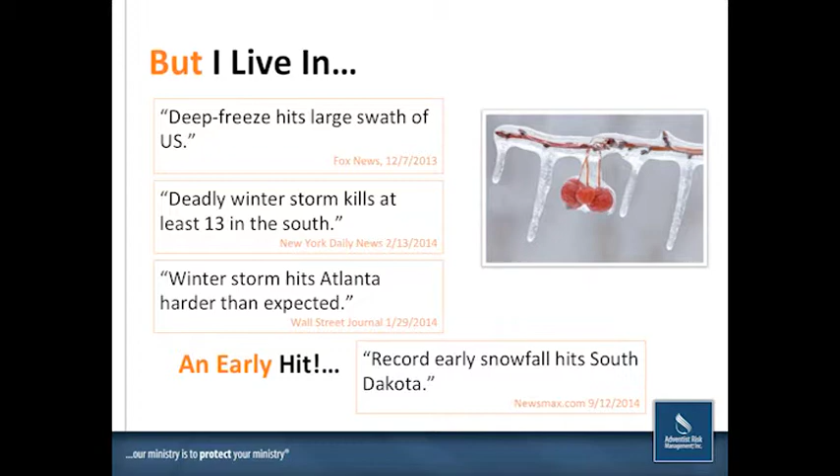And then some of us have had an early hit. Look at the record early snowfall that hit South Dakota, 9/12/2014, and everybody knows Denver has already had some snow. Wyoming got hammered. So these are the kinds of things we have to be ready for well in advance in some areas, and in others it could come whether we expect it or not.

Now we talk about being prepared with winterization, but in some ways it should really be part of the year-round preventive maintenance program. How our systems work and what we do to keep our buildings in shape are critical year-round. As you can see in these pictures, there isn't much excuse to have a bush growing on top of an eave like this one over the dock overhang, and this gutter, as you see in the picture on the left, with plants growing in it.

Those gutters are not going to do the job they're intended for. The water will not flow away from the building. It's very likely it will back up, could go underneath the roofing materials, and then seep into the building and cause damage. When we have deficiencies like this, it's very important that we look at change.

We have to develop a good preventive maintenance program and make sure our gutters are cleaned. During the fall they're constantly filling with leaves. This picture in particular was not during the fall, and neither was the one with the tree, but they'd had plenty of time for this vegetation to grow because I was looking at it in early summer. So start early and keep up with these kind of things on your property.

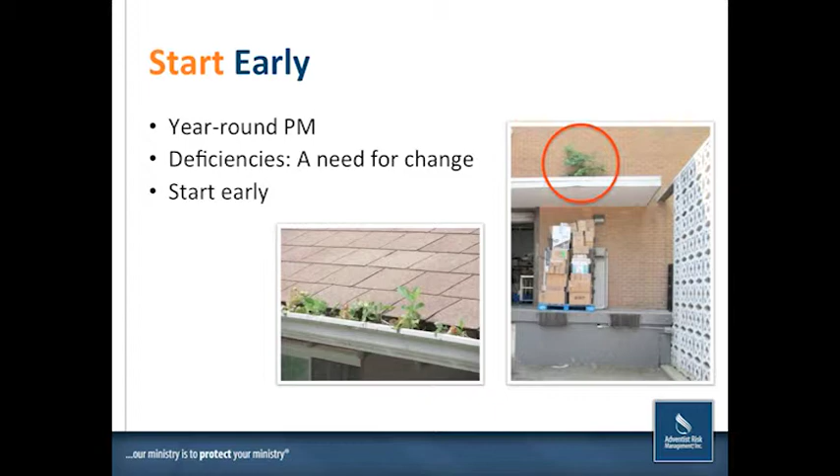Have we planned ahead for what can occur? We could very easily have power outages that will prevent us from being able to use our heaters, which can then lead to frozen pipe issues. So we may have to think seriously about secondary power, like generators or something, to make sure we can keep our buildings warm and not have the pipes freeze and break and cause subsequent damage.

Snow and ice removal, a lot of facilities will contract for it. If we do it internally, we have to make sure we have all the proper melting materials available, shovels, people ready to respond when the storm hits, and get the sidewalks cleaned up so we won't have slips and falls and those kind of losses.

The easiest way is to contract. If you've got a dependable contractor who'll come in and make sure your parking lots and walkways are clear come Sabbath for church, then your deacons aren't running around early trying to get that done and slipping and falling themselves before they finish it.

And roofs, making sure we don't have that buildup of ice and snow on our roofs. That's a dangerous place to be. If you can contract it, that's the better way to go. There's some who will have devices along the roof line that will help melt it along the edge so it doesn't build up as much behind it and create a dam.

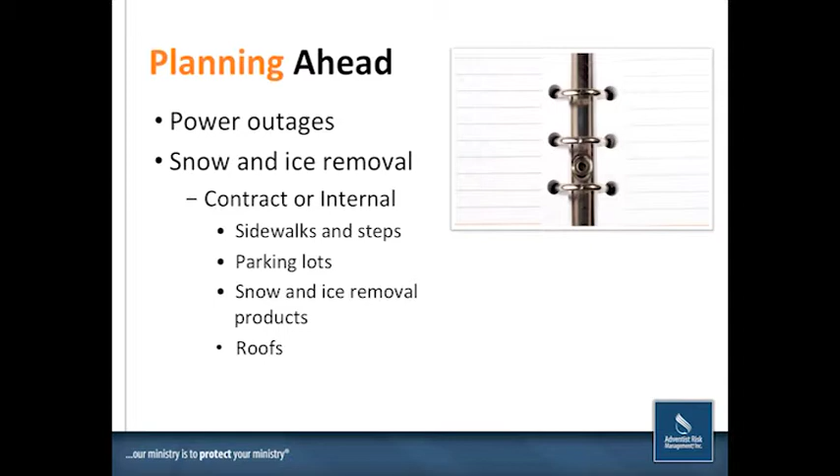Roof protection is important. It will subsequently lead to a lot of leaks internally if we don't take care of our roofs. And when those winter storms hit, it'll seep in, or if there's winds involved, it'll tear things up. As you can see with the shingles on the right that are starting to lift, once you get a lot of wind, those shingles are going to start lifting more and more, and eventually there'll be a whole patch of unprotected roof that can lead to a lot of damage.

The little device you see on the left is the kind that, when buildings are designed, should be built so strong winds can't lift roofing materials. Those kind of brackets attach rafters and things to the sidewalls and make sure that doesn't happen.

And we talk about our maintenance. This is an actual picture I took in the field with a tree laying across the roof line. It has already caused damage that could lead to leakage. When we arrived, I don't even think it was in a work order process to take care of that tree, but it definitely needed some, and needed repairs made before they got rain or other things that could damage it.

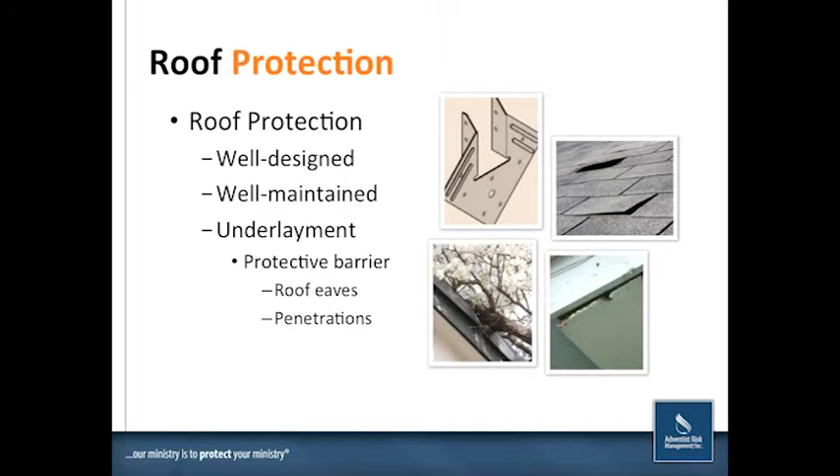The eaves, with the eaves hanging down like that, a good windstorm comes in, that's going to be gone. Wind blowing rain and other wet stuff will just go in underneath that roof, and you can end up with more internal damage. So what have we done to seal these penetrations up? We need to properly take care of our building.

Heating system maintenance is crucial. Make sure that we have that checked at least annually before the season starts, to where they're checking the equipment, looking at the chimneys, making sure we clean those out, and the flues, getting out all the tars and things out of those.

And it's best if we have that done by a qualified licensed contractor. They know what to look for. They're in there identifying things that need to be taken care of before those winter storms hit, and they get it done.

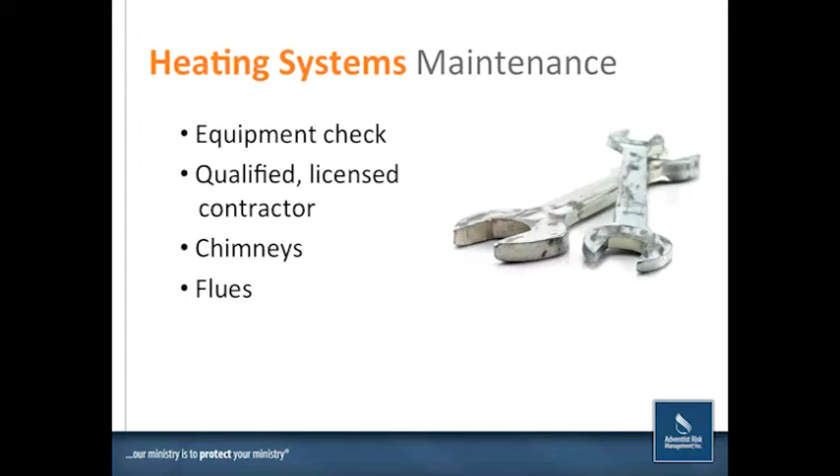Temporary heating. We've had issues with that before. I know sometimes we don't have as good a heating as we may want in a facility, so these may sometimes be necessary, and where they are, they are. But it's important when we do bring them in that we make sure that they're approved by a good underwriting body, UL or Factory Mutual, or some of the other companies that do the approval on these things.

Make sure they've got tip over protection, especially these with the heating elements in them, so that when they fall over, they will automatically shut off. I've been in places where they still occasionally don't have that tip over protection. Those are really old heaters when they don't.

You might consider the oil filled units. They don't work the same as the heating element types. They don't get quite as drastically hot, but they get warm enough to warm a room. I've used them, they work quite well, and you don't have quite as much worry over fire with them.

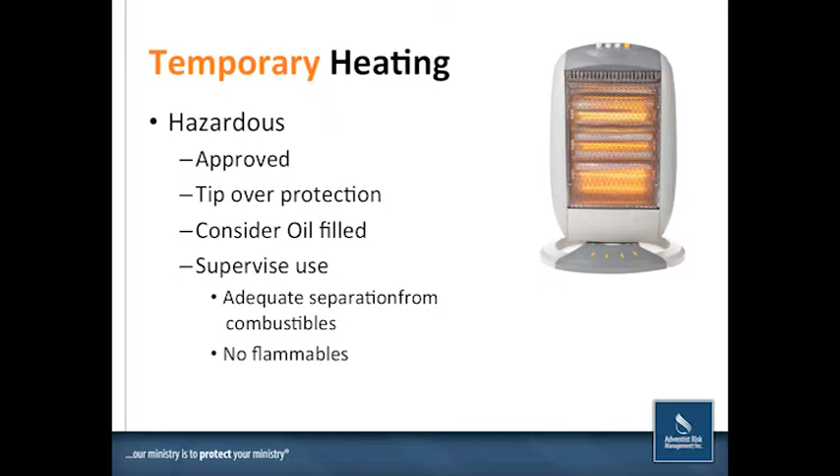Whatever is used, make sure you supervise that use, that wherever those heaters are set up, they're not near combustible items like trash cans. Sometimes people will put them under their desks, and where do they happen to have their trash cans occasionally? Under the desk. So we need to make sure those are properly positioned away from anything combustible. And if there's flammables in the area, I'd suggest removing them and getting them stored somewhere in an adequate approved flammable storage cabinet.

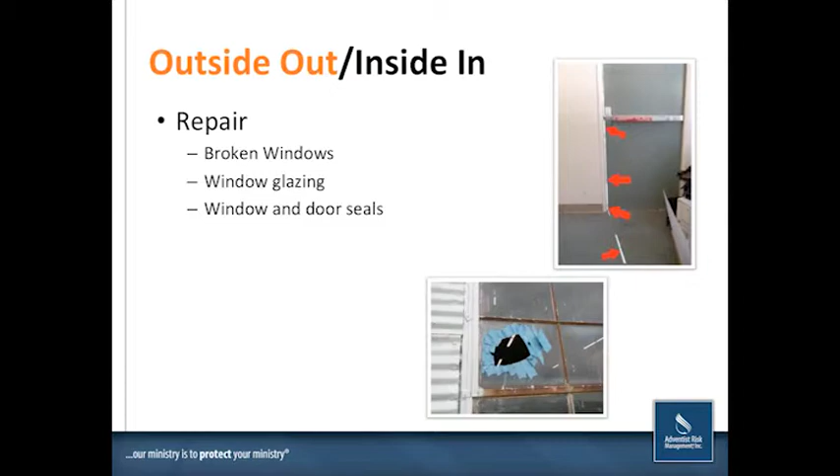There are ways you can actually pressure check and blow particles around to see if there's leakage around windows and doors. Obviously, you didn't have to go very far to know they've got a problem here, and that problem needed to be fixed. So what can we do?

We can insulate our attics. Those are the easy ones. We can always blow in insulation into an attic area and increase the insulation there. It's not as easy with walls to try and increase insulation in walls.

But we can also wrap our plumbing and make sure that we insulate it. In the old days, we used to just use newspaper to wrap the plumbing, then we'd put burlap around it, and then wrap plastic around it, making sure we didn't compress it. Well, nowadays there's all kinds of extra things we can use, regular good insulation for plumbing, and in some cases they have electrical devices that you can wire that will help keep the plumbing a little bit warm so that it doesn't freeze.

There are precautions with that, and we have to make sure that we follow those precautions, as I mentioned in another slide, so that we don't end up with a fire.

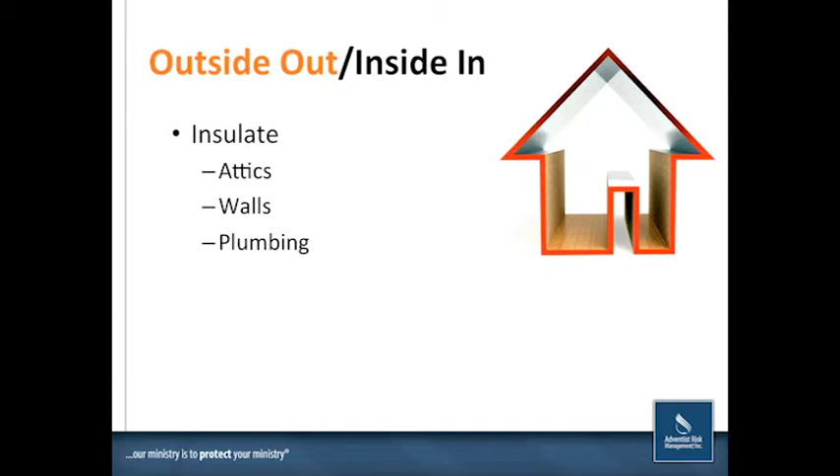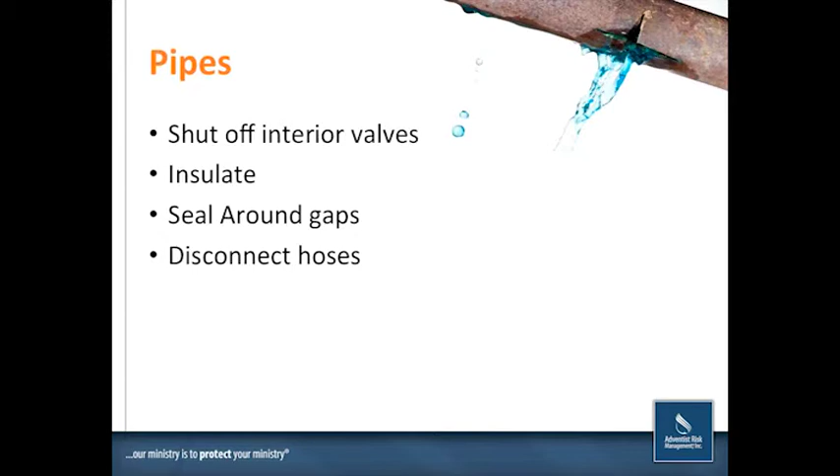Our pipes, again, we need to make sure that we shut off our interior valves, make sure that there's not water between that and the outside, so that it would freeze. Insulate your plumbing, seal around gaps where the plumbing comes through. A lot of times in some facilities that's not sealed real well. Disconnect your outside hoses that can freeze and expand back into the pipe, so pull those loose. Heating tape is the electrical device I was talking about a moment ago, and there's pros and cons with that.

We have to make sure that it is certified and approved by the UL approval type companies, or Factory Mutual, or one of these, there's Canadian approval companies too. And we need to make sure that we install it per the manufacturer's guidelines, whatever they say we need to be doing to do it. Otherwise, it could result in overheating or fire or shorting out in some way.

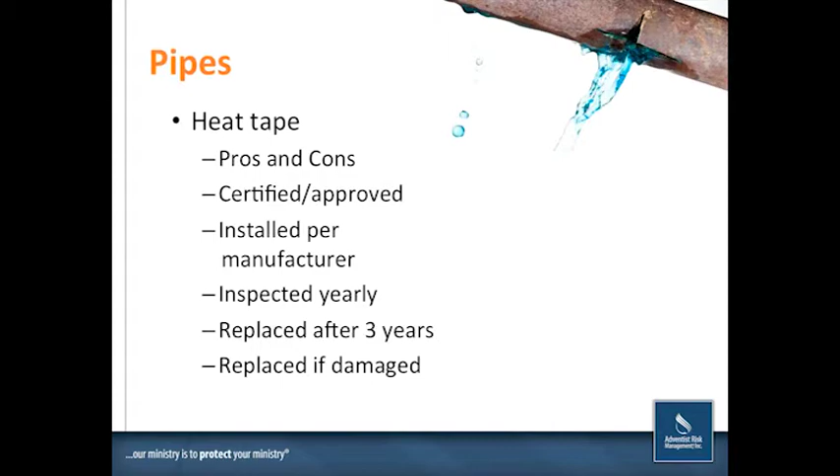Inspect them yearly. Look to make sure there isn't any damage to them, that temperature and weather hasn't started to crack the materials or the wiring or something like that. And it's usually recommended that they be replaced after 3 years of use. Obviously, if you see damage, replace them immediately.

Exterior conditions: make sure our gutters and drains are cleaned out so we don't have leaves, twigs, debris, and other things in them. In the fall they fill up really fast with leaves, so we have to keep those cleaned out.

What's the condition of our roofs? You saw the picture earlier where some of the roofing was lifting up a little bit. There are other types of roofs, like flat roofs—what's the condition of those? Are there cracks in the seals that may start leaking? What's the condition of our siding or awnings or anything that can be caught in the wind and ripped loose and possibly blown through a window, causing a break? Any of those can result in further damage, wet walls, or water coming through a broken window.

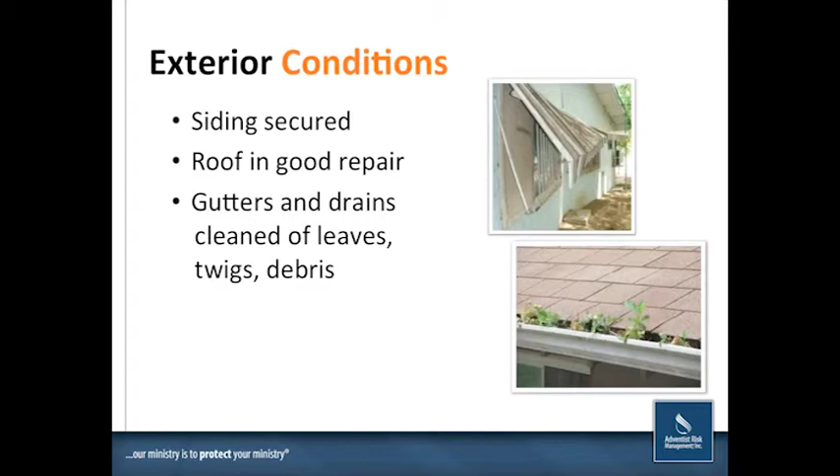Vacant buildings have resulted in a lot of damage, and in many cases some of our buildings, even though we use them a lot, are vacant all week. They're vacant when those storms hit, so there are ways we need to be prepared for that, whether they're permanently vacant or not, to try and reduce the risk.

If we know a really bad cold spell is coming, shut off the water. Don't let water-filled pipes sit throughout the facility where they can freeze and break. Drain and blow them out. Usually there's a low spot you can drain your plumbing from, but it helps to go the extra mile of blowing out the plumbing.

I used to have a piece of property in Flagstaff, and I remember going there one winter after I had drained all my piping out. I learned the hard way about blowing out those little places where water can get trapped, and the importance of having air blow that water out. As soon as I turned the water on to the double wide I had up there, it sounded a bit like a river flowing. There were numerous breaks in the lines, and it took some money and major repairs to get it back up again—so I obviously did not stay there that particular weekend.

Remove water from toilet tanks. As you can see in the picture on the right, if it gets cold enough in a facility, that water freezes, expands, and bursts. Then you get more damage as the water thaws out and continues to flow.

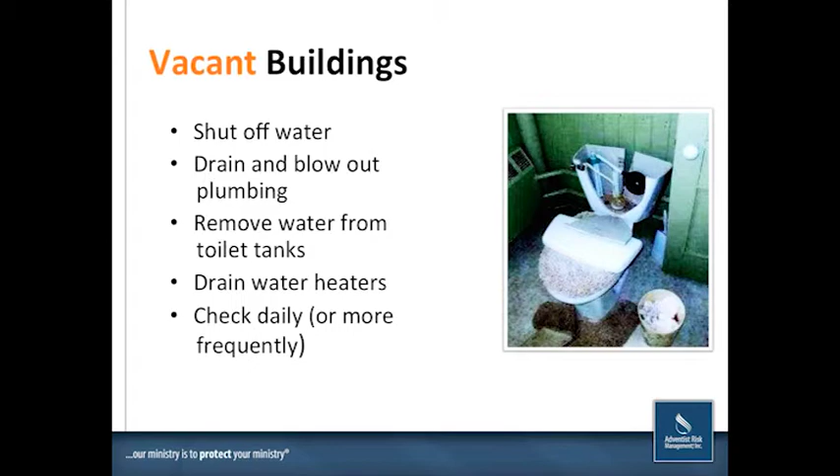Maintain warmth—that's an important part. Keep the inside of the facility warm so we can keep the plumbing warm. The recommendation in many cases is 55 degrees Fahrenheit, or 12.78 degrees Celsius. If it's a poorly insulated building, you may have to set your heat a little higher to keep it going. Yes, you may have a higher utility bill during that period, but trust me, that bill will be a lot lower than what you end up paying in deductibles, damage costs, loss of use, and everything else that goes along with damage from frozen pipes.

Open your interior room doors and cupboards so warm air can flow around and get into those cupboard spaces. It's amazing how different the temperatures can be between the outer room and underneath a sink if that cupboard door is kept cold and closed. Keeping it warm also prevents the dampness and mold buildup you smell in a lot of old facilities—keeping the temperature warm helps keep that mildew down.

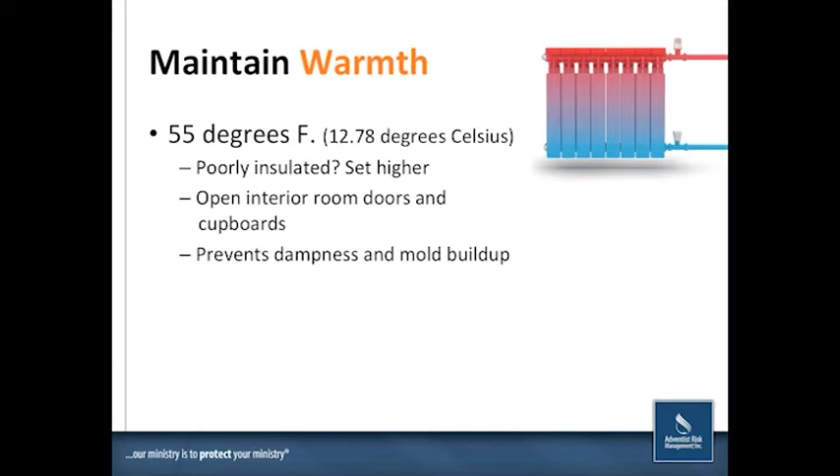If worse comes to worse—and we hate to do this, especially in areas where water is at a premium and we have shortages—the only way to possibly help keep our pipes from freezing is to run the cold water a little bit, usually about the width of a pencil, to let it continue to flow. It wastes a lot of water, but hopefully you can keep your building warm enough to avoid this last resort to keep your pipes from freezing.

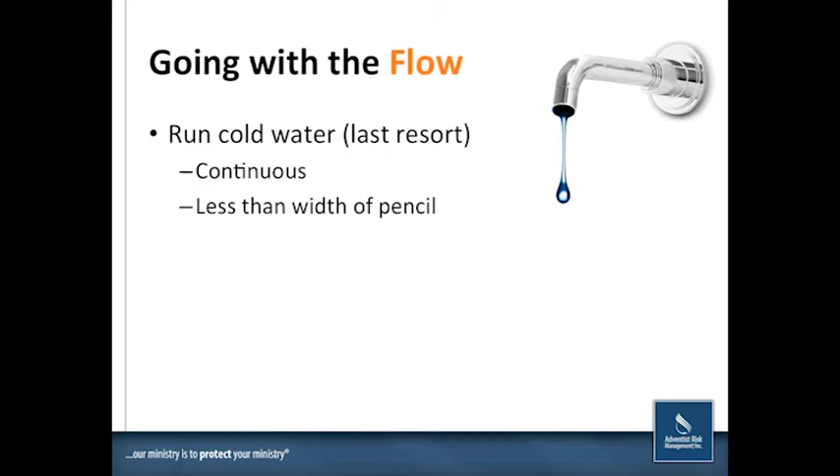Protecting people is crucial—the slips and falls we get during wintertime are numerous. To prevent them, we need to make sure our parking lots, sidewalks, steps, and entrances stay free from ice and snow buildup. Make sure we have melting materials and shovels on hand, and non-slip floor mats at entrances. Sometimes I'll go into a facility and find someone tossed down a towel to soak up water tracked into a room or entrance—wet towels are slippery, extremely slippery.

So you want to make sure that's not the method you use. Some good non-slip floor mats will help if you're in an area where you're going to get rain or mud tracked in—make sure you always have non-slip floor mats present to pick that up. If you do get wet floors, throw out your caution wet floor signs immediately and get the mops out there to take care of it right away. The longer it sits there, the more chance somebody is going to slip and fall on it.

Hanging icicles, I think we've all seen those. Some of them can get pretty big and pretty dangerous. So we want to make sure we don't let those build up and just keep hanging overhead, ready to come down and either hit an individual or a vehicle or something else and cause severe damage.